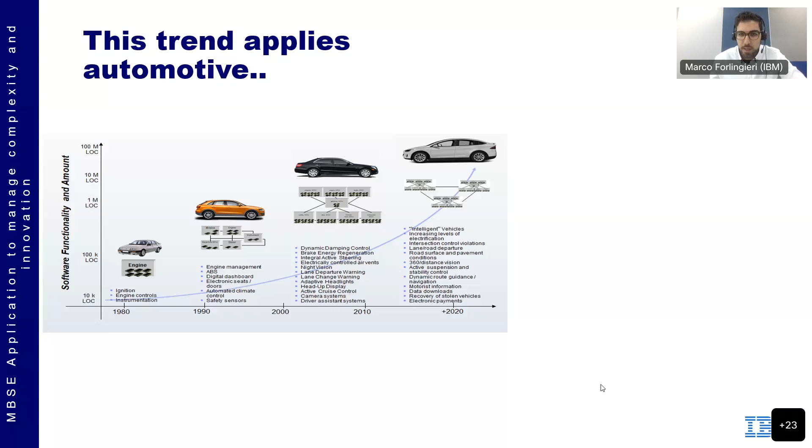The increase of complexity is mainly due to a high amount of functionality, a high amount of interdependencies, and a high amount of regulation as well, that are transforming the way cars are produced and of course later, once in operation, driven. So which are the key drivers of this complexity? According to INCOSE, the International Council on Systems Engineering, in the Systems Engineering Vision 2035, two main drivers are mentioned for this increase in complexity.

First is the technology-driven complexity. What does it mean? Let's have a look at the car. Before, mainly we had a type of development that was more mechanical and electrical intensive. Then we had the era of electronics. We went into the software era, where software started to be more and more important. But now we are already overcoming this era and we are entering into the network intensive and algorithm intensive.

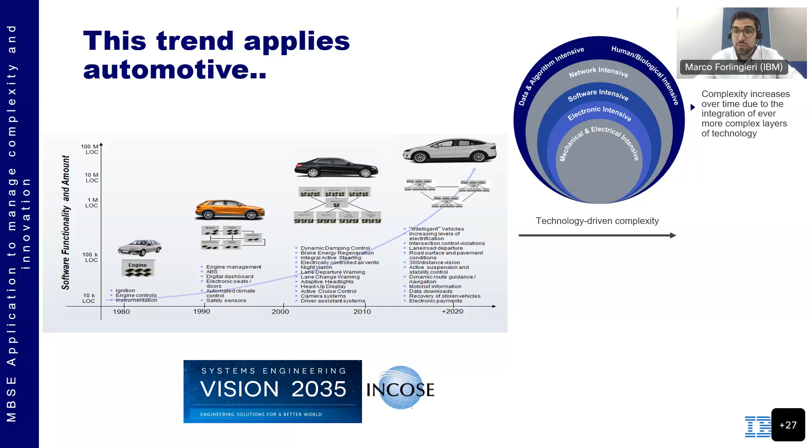What does it mean? That cars are connected, cars need to adapt their behavior. Imagine the topic of autonomous driving, for example. So there is a change of technology that is driving this type of complexity. And then we have a second driver. The second driver is the scope.

Before, each team in an engineering organization, an automotive organization for example, was focused on developing the ECU, the specific function, the specific component, the box. And now we are going more and more into integration of the different boxes, integration of the ecosystem of suppliers, up to system of systems topics.

So it's not the car anymore, but it's the car in its context, from the way the car is charged, if it's an electric car, operated, and dismissed. So the entire life cycle of the car. That's why we have a system of systems topic. And these two main drivers increase the complexity of the development dramatically.

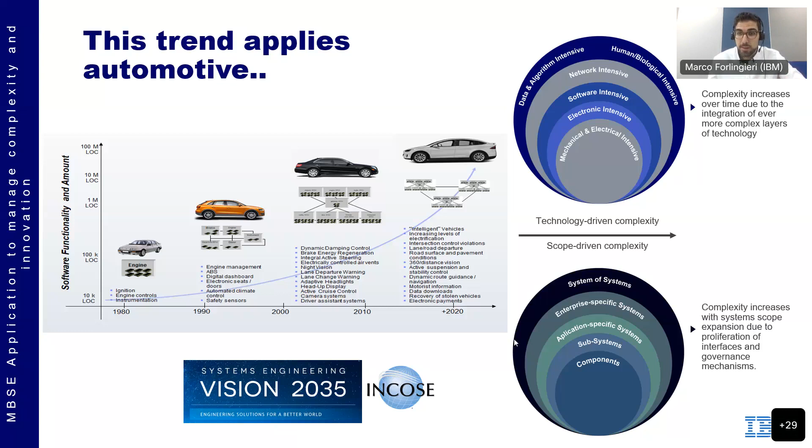By the way, it doesn't apply only to automotive. My previous company was Airbus. So I've been working in the aerospace domain, and we have the same trends there as well. Exactly the same trend applies also to other types of companies and other types of systems.

But coming back to the automotive, that's our focus for today. This complexity is also a consequence of some trends that are occurring in the automotive industry. First, the process of electrification. So we have more and more electrified vehicles, and companies are switching more and more to electric from hybrid. First, there was a big hype on hybrid vehicles. Now we are going to really electrical vehicles, and many companies are switching completely to electrical vehicles.

We have the next generation of EE architecture, so the architecture gets a new way of being developed. We'll talk about that in the next slides. And of course, a big concept, server zone architecture, where the architecture of the car is completely reinvented, and Enrico will explain this concept better later. And other trends like ADAS, autonomous driving, up to the driver experience, so the infotainment experience. The driver is at the center, is not just driving, it's the experience of driving.

And of course, all these trends have something in common. They have in common the high presence of software in this mechatronic system. In the future, software will account for 90% of the future innovation that exists in the car. And basically the lines of code in the car will just explode. And this is probably a good way, because we are going into a software, more manageable in theory, type of development. However, this creates a parallel side effect.

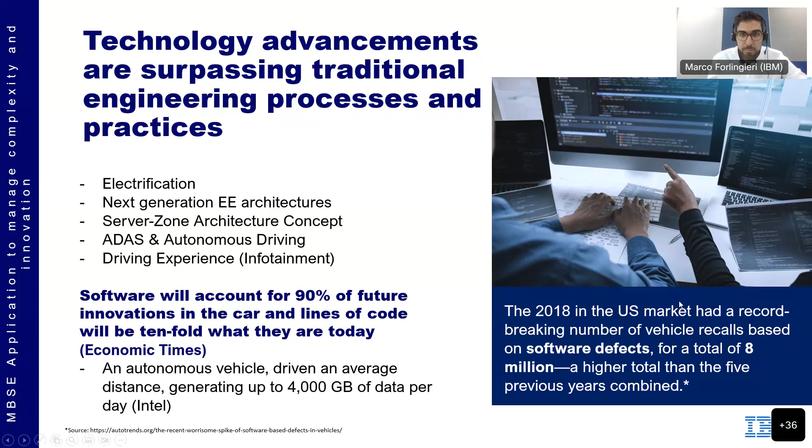Another example, now I'm going slowly into the depths of the topic, is that these defects either produce a recall of cars, that's really bad actually, from an economical perspective and the image perspective of the company, but also create a lot of delays in the development. Just some figures here: 40% of the automotive vehicle parts have delays, are produced late.

And then, in this complex context, the automotive industry is going to the next generation E/E and software architecture, so electrical, electronic and software architecture. And of course, we may think it will be much simpler now because we go away from the mechanical parts and we reduce all the interfaces, all the harness and all the wires, and the architecture will look much cleaner. Yes, of course, but this can also delay more and more the time to market because the team needs to know how to develop this new architecture. It's an innovative new concept, needs to be tested, needs to be developed. So we cannot do it in the traditional, old way, because as I said, we have this complexity that is rising and rising.

And what is this example of simplification that companies are trying to make in this E/E architecture? It's very simple. Today, an average architecture has around 100 ECUs, small boxes where each box has its own implemented functionality, its own implemented scope. And they communicate with each other with buses and with wires and with sensors and actuators. And all of this is working. Yes. Now, is it efficient?

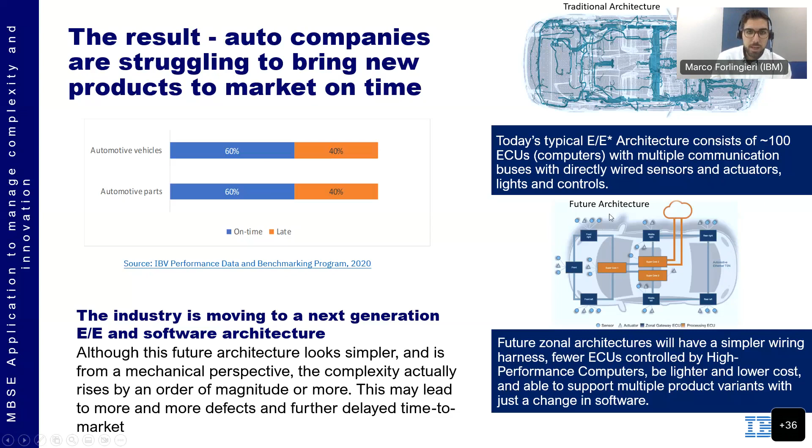Well, that's why we are probably going into the new future architecture, where there will be a zone architecture, much less wiring, dramatically reduced ECUs, and there is a high performance computer, the server zone, that's why the architecture is called like that, that will take the lead in enabling and hosting the functionality. And many more products and variants can be developed much faster based on the functionalities that we enable or disable within this big high performance computer that will control the car.

So their decision was to go with the IBM solution and to apply, as we will see later, model-based system engineering together with the engineering collaboration solution. And so I'm trying to introduce now how IBM can help in this context. Basically, when they talk about using the IBM solution, the two leaders of these two automotive companies, clients of IBM, mainly refer to the engineering lifecycle management solution of IBM.

In a few words, the engineering lifecycle solution of IBM is a solution that enables companies to develop system and software along the entire lifecycle in an efficient way, in a collaborative way, and producing better deliverables for the system and for the software. The solution covers the requirements part, so requirement management, the workflow management, that's basically the planning part, the change tracking, and the test management. The test management is all the right side of the V model for those of you familiar with the V model.

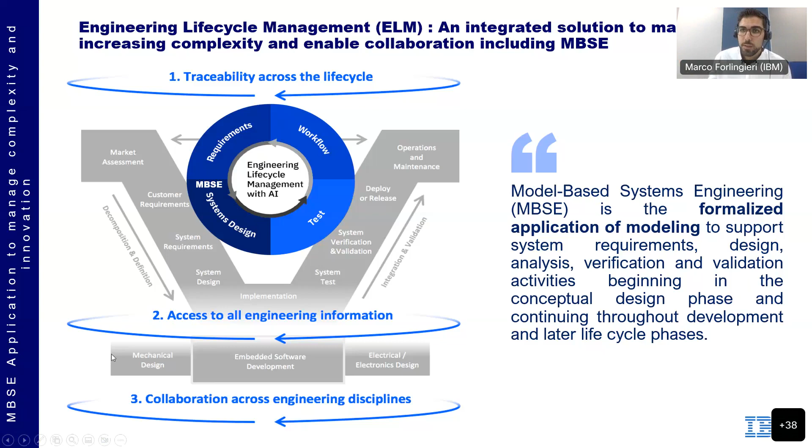System engineering is how I can produce my design artifacts or requirements, design analysis, V&V artifacts like test cases, activities, work plans, how I can produce and manage them from the beginning of the development project up to the end, and also after the project is in operation. You can do it in a traditional way, or you can do it with the support of models. That's the key role of MBSE. Let's deep dive a bit into this topic.

We learned before about this increasing complexity that is difficult to handle with traditional approaches. Which are the traditional approaches? First, companies use manual documentation, Excel, Word, PowerPoint, just to mention some of them. And we want to go from manual document-based engineering to model-based automated engineering. We want to take advantage of the models, and the model will bind all the artifacts together, and we can still produce the documentation that we need, but we produce it out of the model, out of this single source of truth.

The second topic: many companies still work in engineering silos. Each team does what they have to do and delivers their own deliverables. They don't talk so much. When they talk, they don't understand each other. So we need to go away from this silo culture into a collaborative and integrated engineering culture where everybody understands the scope of the work and has common guidelines to progress. And there are several checkpoints along the way that ensure that people are doing the right things.

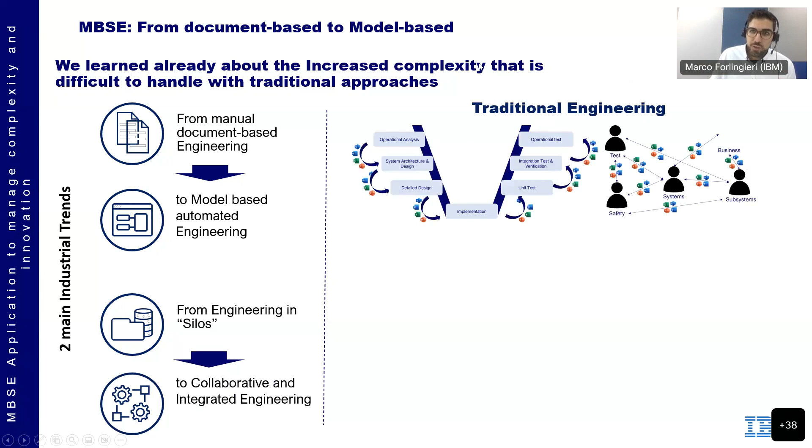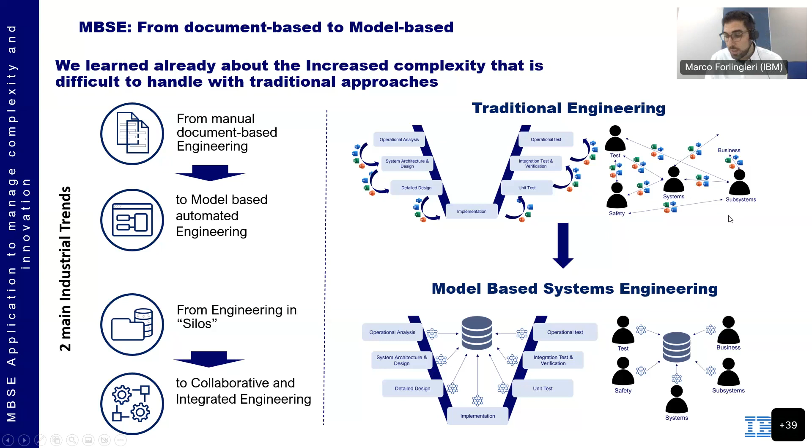That's why we need to overcome this traditional engineering based on documents, silos, low communication, and problems during integration, and go into model-based system engineering, where the so-called system model will enable this type of collaboration and will facilitate the work of the various engineers and the production of the engineering artifacts and deliverables. Quick one about what a system model is.

Let's start with the system. The system is the system that you see in reality. Let's take the car as produced. But of course, the model cannot be exactly like the car as produced. It needs to be simpler and needs to be an abstraction of the system. Otherwise, we will have a duplication of our system in a digital way.

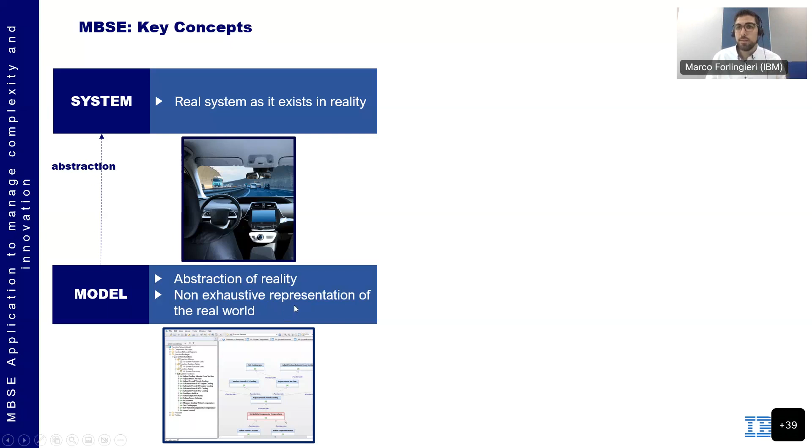That's not what we want, because the model doesn't need to represent all the system, but needs to focus on the high-level part, on the key parts of the system, on the viewpoints of the system that are of interest to the engineers. And then we distinguish between two types of models. First, we have the descriptive models, basically models that help you describe the architecture and the interfaces, and produce the specification.

I use this mainly for knowledge capture to produce the specification of your system. And then we have the analytical models. The analytical models express a behavior and give you the possibility to verify and test this behavior.

And to check if the behavior is as intended, as designed. This is the main difference. So today we will show you a descriptive model, and then we'll go into the analytical model.

That's what Enrico will show you later. But which are the key things when a company starts MBSE? Which are the three pillars of MBSE? First of all, process and method. So we need to start with the process and method. How do we perform system engineering? How do we perform the company processes that we have in place, or that we want to put in place, in a better way, using system engineering, using models, using a language and a tool, for example.

Then we need the language, of course. So we need to keep a notation and a semantic that people can use to understand each other. For example, the system model is represented in system modeling language. And then we need the tools. The tools needed to implement the methodology, to implement the processes, use a specific language, SysML language, and they can be used by the users. So the tools help in implementation, actually a key factor in the implementation of model-based system engineering.

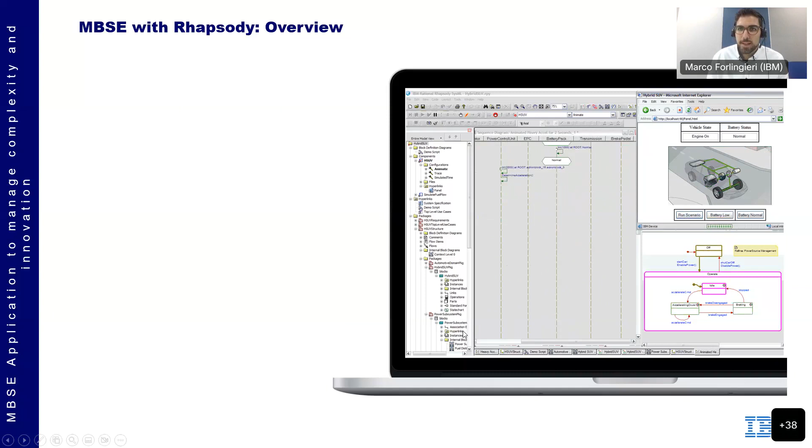Talking about tools, we have Rhapsody. Rhapsody is basically the oldest tool and still a market leader. It's one of the first tools based on UML and then on SysML. As an MBSE expert, I feel really proud to work with this tool because it's like the pioneer of software engineering, of system engineering. And Rhapsody supports all these things that I mentioned before.

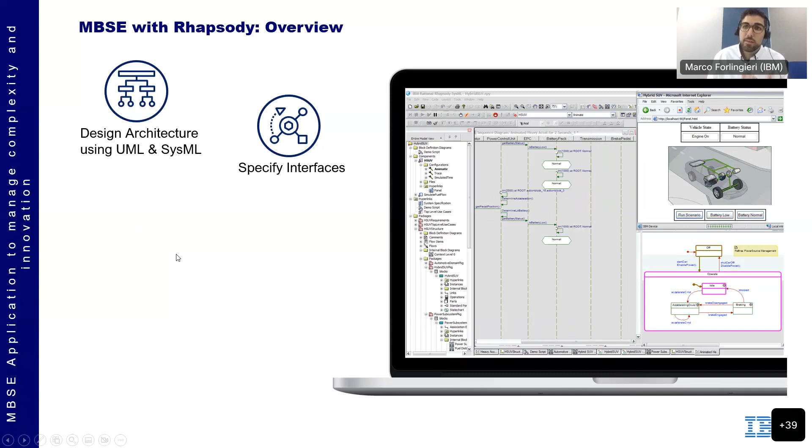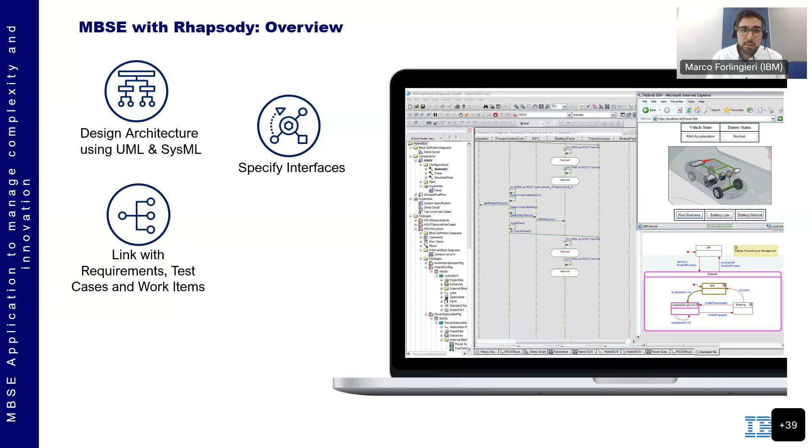Enrico will go into this in a few seconds. So the design of the architecture means descriptive modeling with UML or SysML, specifying and describing the interface - not just an interface control document in Word, but really modeling the interface of our system, of our software. Linking the model with other artifacts that are not models, like requirements, test cases, work items. Executing the model, this analytical model, so we can test it and see it's really doing the behavior as intended. Run the simulation.

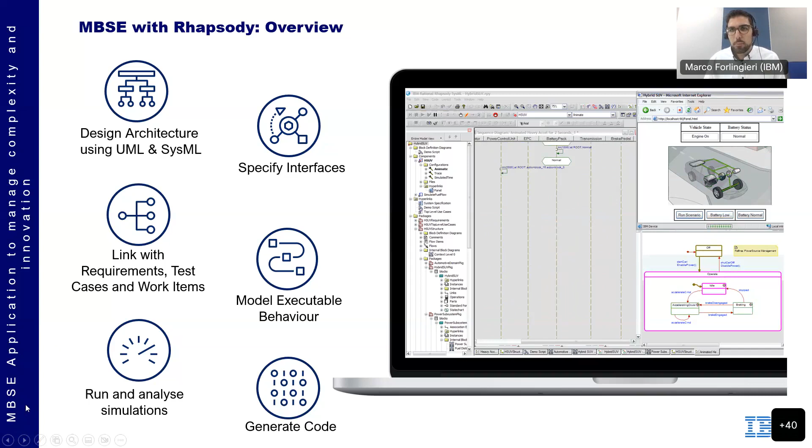We can use the model to run simulation within Rhapsody, with other tools that interface with Rhapsody, and also, for those into software development, to generate code. These are just some of the features that Rhapsody has in support of MBSE, and Enrico now will deep dive with examples into some of them.

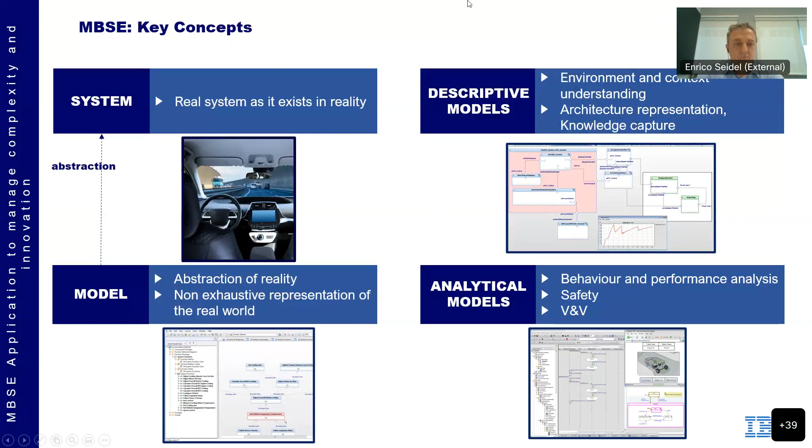So some brief words about Continental. Continental is, beside maybe some of you guys know this, famous for the tire business. But beside the tire business and the rubber business, which is called ContiTech, automotive is by far now, or became by far, the biggest group within the Continental Corporation. And I'm working for the architecture and networking group, which is a kind of specific group for all the other four business areas: safety and motion, autonomous mobility, user experience, and smart mobility.

So what is architecture and networking doing? Architecture and networking is basically building the platform for all the other business areas. It builds the communication backbone by systems. We call it also an enabling system. Those other functionalities for autonomous mobility, for the user experience, can run on this network, can run on computer platforms, on processing platforms, to execute their functionality.

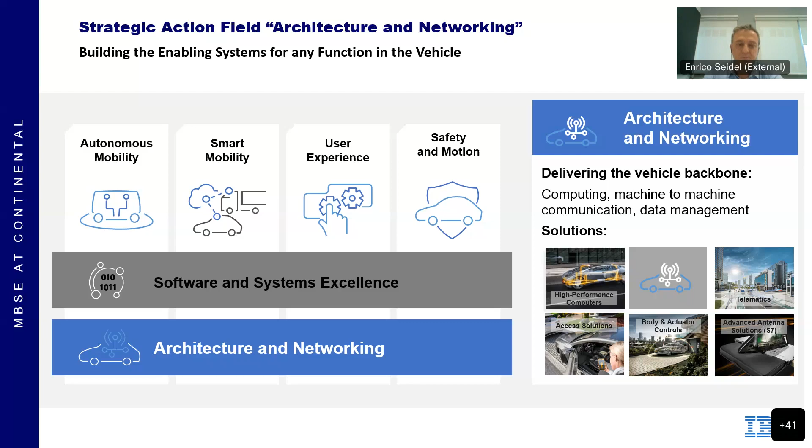And Continental is also leading in advanced antenna solutions to connect our vehicle to the rest of the ecosystem. Let's now catch up on what Marco said before, that we have had, in recent years, a revolutionary change within automotive.

We talk about that the cars are changing from a component-defined architecture to a function-defined architecture. What does it mean? A component-defined architecture is fixed during design time. So whenever I want to place a functionality in a car, hundreds of engineers are sitting together and designing for this and that component what the car functionality should do.

And then it will be developed, designed, realized, produced, and the car has then a fixed functionality, which is hard to update for future functionality without a bigger architecture change or a lot of software change within those software components. Each of those ECUs have then basically domain separated and isolated functionality, which also results in lots of wires, a heavy wire harness. And together now with the change to electromobility, there is really the need to lighten up the vehicle, since the battery is also a heavy component.

So reducing the wire harness, reducing the number of wires, is to bring more and more communication lines between those units and to reduce the number of units. In the past, we had the focus of pleasure, safety, and comfort as a user expectation. While now, the user expectation is becoming more and more that the car is like a smartphone on wheels or a smart IoT device on wheels, where the user wants to have more and more functionality over the lifetime of the vehicle without even going to the service station.

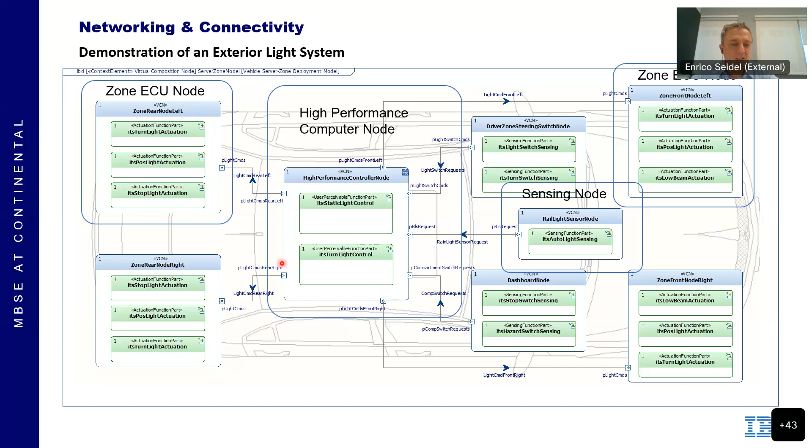And with the combination of those tools, we are able to build a transition from the classic document-oriented design, which is still a big portion, into the model-based design approach. This cannot be done with a big bang. Today we do requirements in DOORS, and tomorrow we do everything in Rhapsody. This will not happen. This will be a gradual approach. And I'm going to show now how we can do that with some simple steps.

So we are coming now to a case study where I try to explain this with some simple functionality of a light function. Otherwise, you get overwhelmed by the complexity behind such a server zone concept. Let's focus on 7 main steps that we need to do, together with an architecture framework behind, to develop such systems. At first, we need to understand from our stakeholder, for example a car manufacturer, what kind of features they want to implement.

Therefore, we can make a so-called feature definition where we use a kind of variability management viewpoint. So we are not just using SysML, we are extending SysML with different viewpoints and abstraction levels to get the scope and the concern correctly understood by each and every system engineer.

So after the feature definition, we need to do a system context. We need to understand how our system of interest, in this example a vehicle, is interacting with the ecosystem, with the environment. This comprises the composition of actors and the system of interest into a block definition diagram. We then build the interaction. I will later show how it looks in the model, those parts, and see in what way they are interacting.

And further, once we have our system context defined, we know how a system from the analysis point of view should look. Therefore, the so-called operational viewpoint, which is the analysis view for a system engineer, we then refine with a so-called operational analysis on that same viewpoint, using use cases and activity refinements to further break down the functionality we intend to develop.

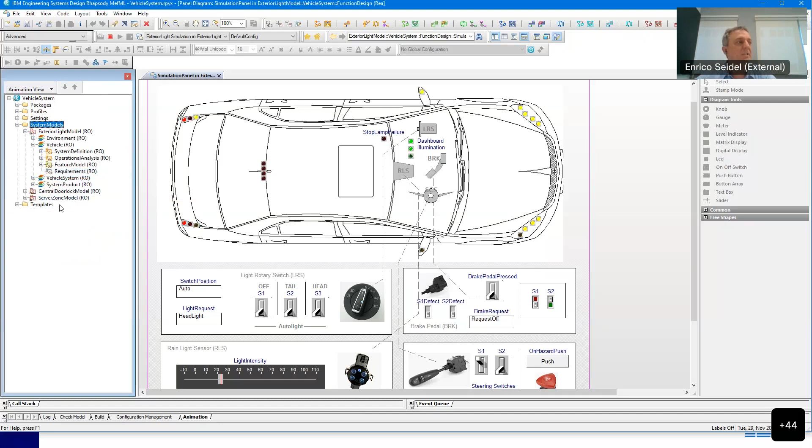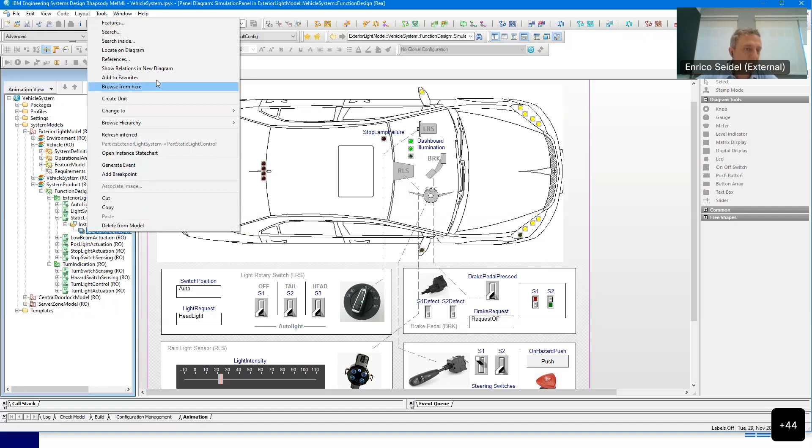And finally, when I want to verify, and I have developed, for example, a state diagram, I can even illustrate this to support my verification so that I don't have to build all the functionality in my brain, which is often the case when I use a classic development, when I read requirements. I basically have to build up the functionality in my head when I combine requirements. And here, model-based system engineering helps dramatically to visualize your intended behavior. And for example, when we go to the static light control, then you see when you model it right, that you can have a kind of a state diagram verifying your intended behavior.

For example, I have here a light switch from the panel. When I change this light switch, I can also place the same light switch on my diagram. It's reflected automatically. And I can change then an operation state. I can switch the light off. It's returning back, for example, to the auto light. I can completely switch off and manually say I don't want to have any auto light control, and so on. When I switch the switch off and I go to an auto position, which can be reflected by graphical elements, what kind of signal, what kind of status I have, then, for example, when I change the light intensity, I can switch between those states and verify that. You see here a way to design your system, to design your functionality, and even to verify it.

What you have seen in previous slides, you can also make a verification using sequence diagrams for a specific sequence you want to show, how access needs to be done, in what kind of way. You can simulate security and safety behavior. You can place dedicated safe states to fulfill the ISO 26262 requirements, and so on. So with a semi-formal approach, as you see here, we can much better cope with the complexity of a system.

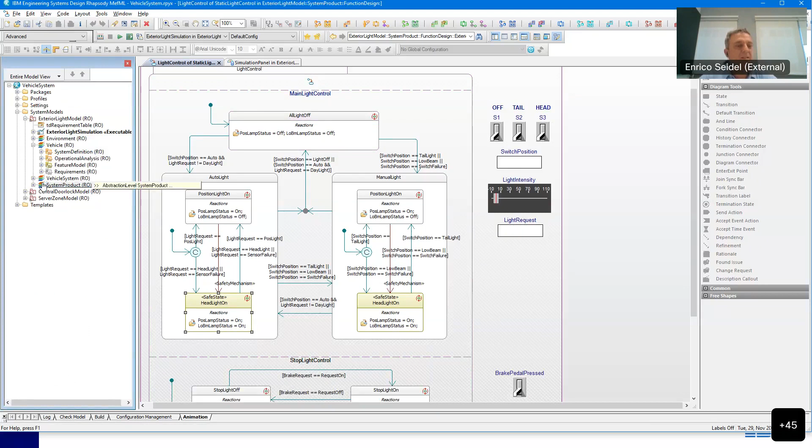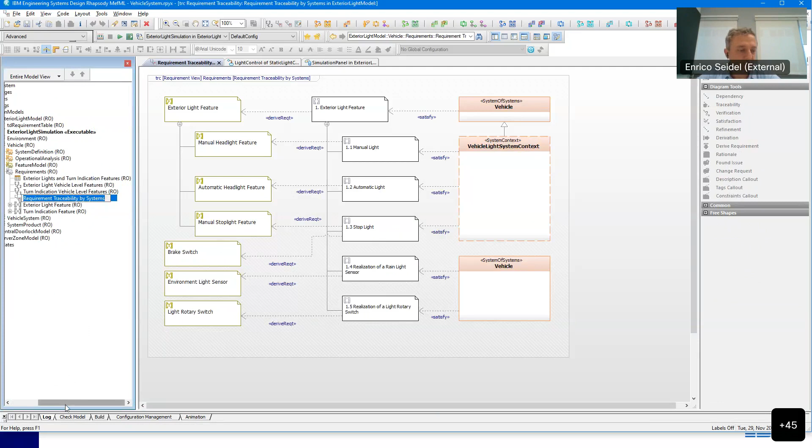Let's have a look at the verification. The verification, let's have a look at the traceability, which was one of the last points. Traceability can be very nicely shown in our design tool, as well as in DOORS, so that, for example, we have functional or technical features which are then derived with a trace link to a requirement. The requirement is satisfied by a certain system element, and so on and so forth.

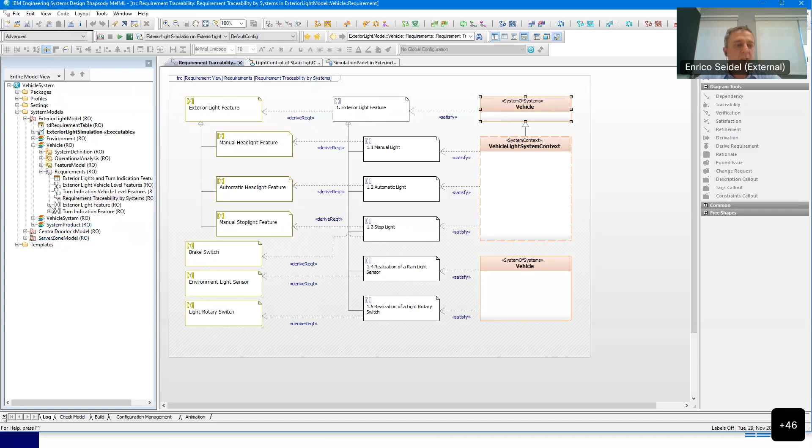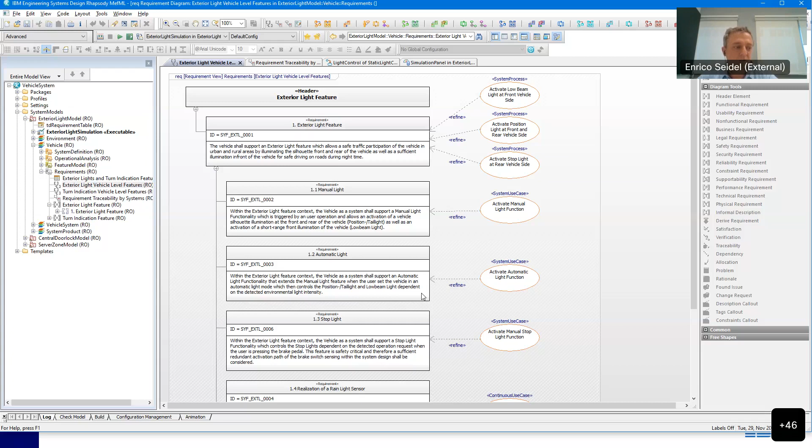So we can even import requirements and make them graphically visible. We can say how we refine a use case here, in our case, for example, a system use case or a continuous use case from those requirements. So the architecture basically forms the center of the product description, which makes us able to cope with complexity. Let's come back to the presentation and have a few numbers at the end.